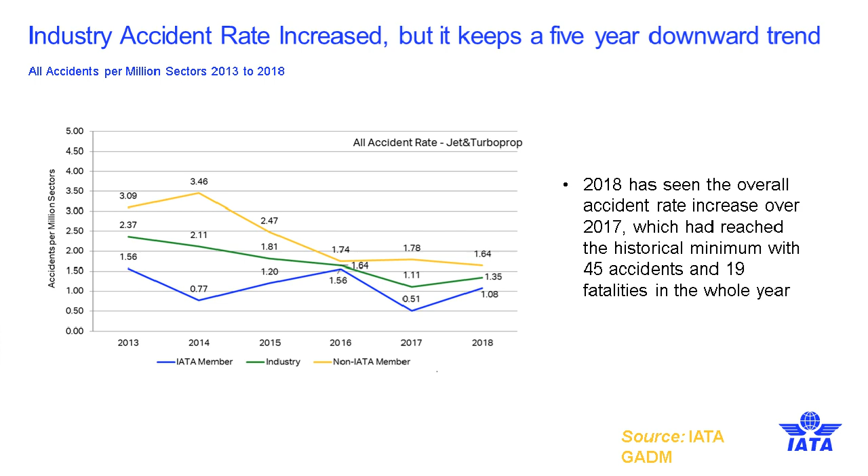We keep tabs on accident rates by region, and here we can see that in 7 out of our 8 regions, the accident rate has increased. The bottom number is a 5-year average between 2013 and 2017. The one in the middle is the rate for 2017, and the blue number on top is the accident rate for last year, 2018.

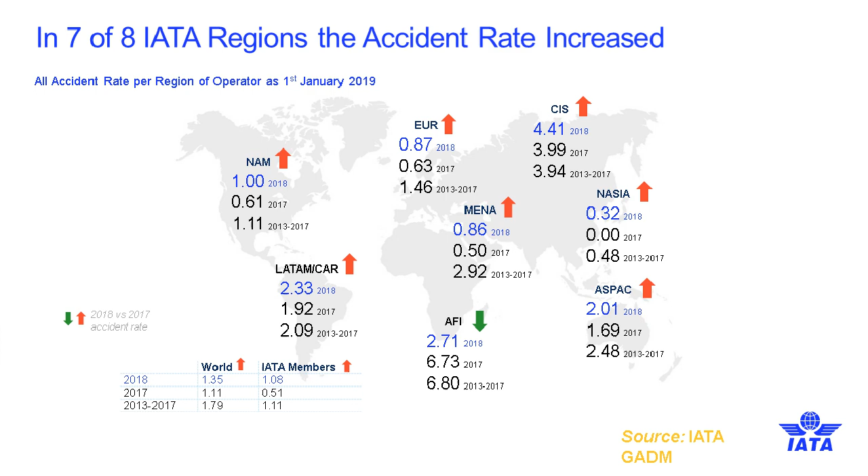As you see in the bottom left corner of the slide, the world accident rate increased from 2017. However, it's lower than the 5-year average. It increased both for IATA members and non-IATA member airlines.

Where we saw a sharp increase is in the number of fatalities, 523 last year. Still, IATA members have the lowest fatality risk, counting accidents per million sectors. However, this has been an increase, and it's the same rate basically we had in 2015.

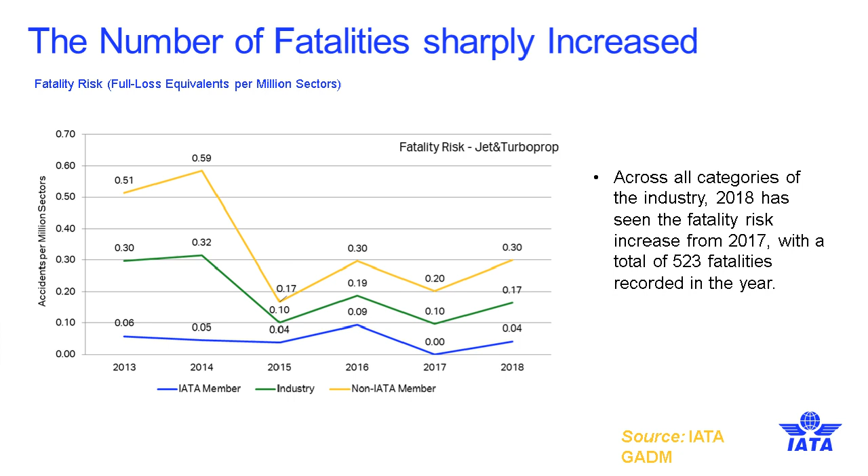When we look at this risk, it increased in 5 of 8 IATA regions: Asia Pacific, CIS, Africa, Latin America, and the Caribbean are the ones that saw the rate go up. IATA members had a slightly higher rate, but still lower than the average of the last 5 years, and the world also saw an increase from 2017.

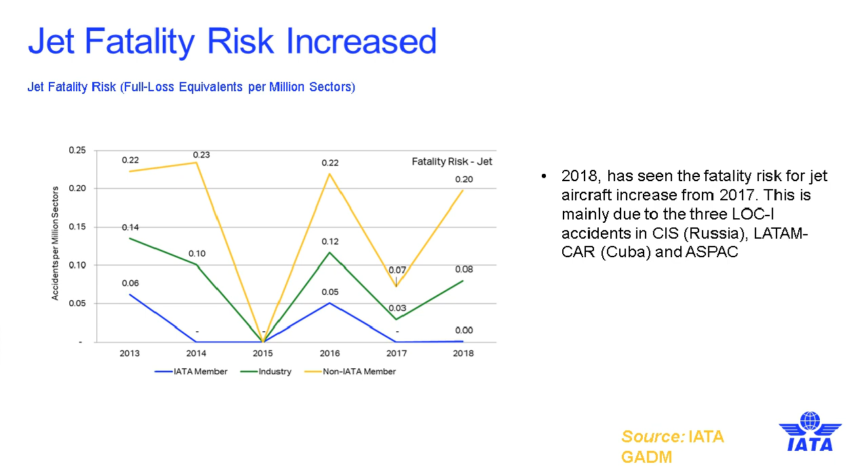Now we look at jets and turboprops because they seem to have generally different rates. What we saw last year for jets was a sharp increase in fatality risk. Again, the blue line is IATA member airlines, the green is all industry, and the yellow is non-IATA members. This sharp increase was mainly due to 3 accidents: one in the CIS, in Russia, one in Cuba, and one in the Asia Pacific region.

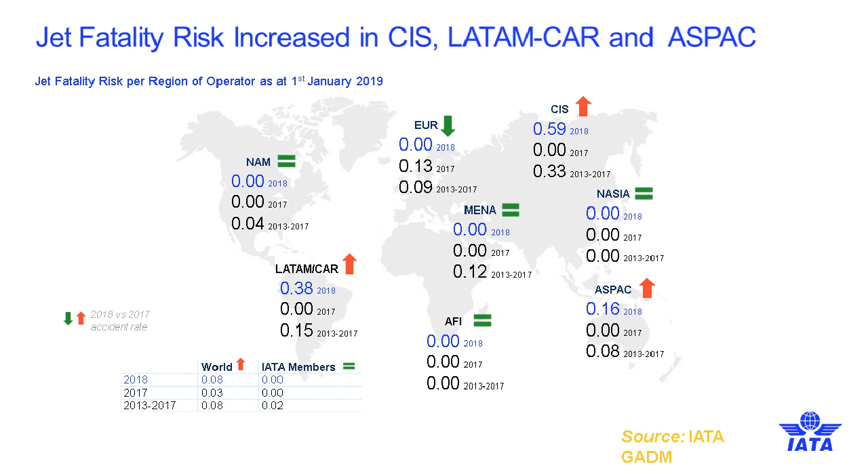By region of the world, this jet fatality risk stayed the same in 4 regions. It went down slightly in Europe and increased in Latin America and the Caribbean, and the CIS, the Commonwealth of Independent States. IATA members, however, had a 0 for 2018 and 2017, while the world went up.

As far as turboprops, there's another sharp increase, this time with IATA member airlines. This was due to an accident in Iran that had no survivors, and it was a controlled flight into terrain.

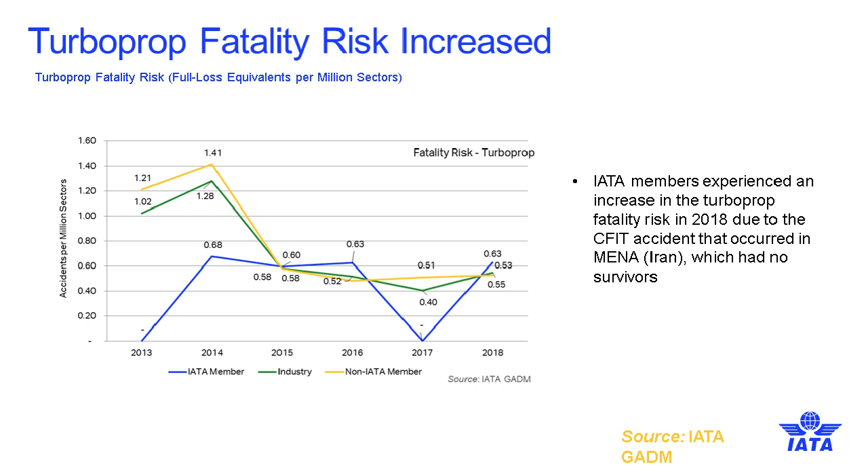And for turboprops, 2 regions of the world saw an increase in fatality risk, Africa and the Middle East and North Africa. Remained the same in 4 and decreased in the CIS and North America.

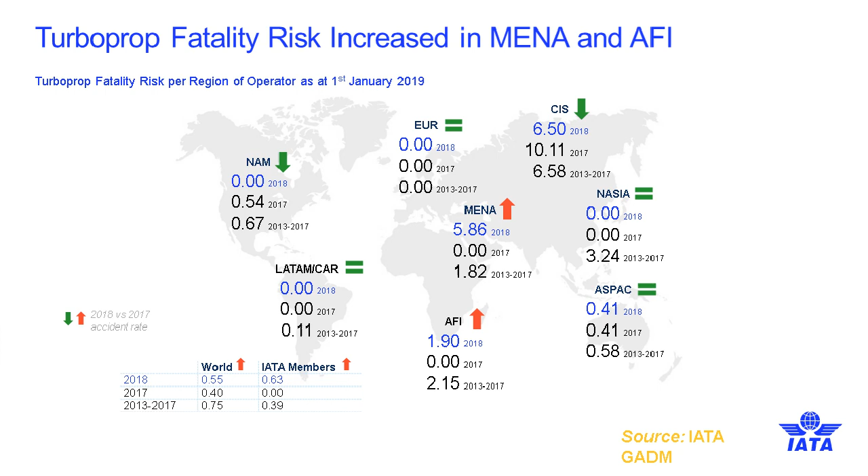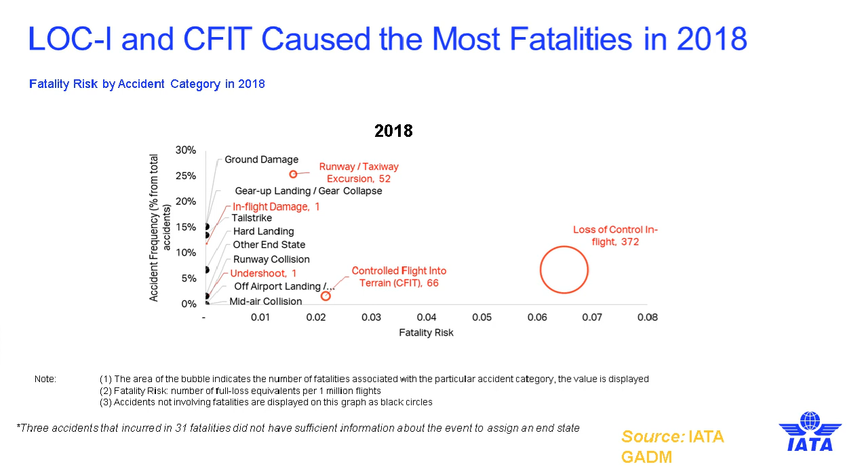Now let's look at the last 5 years for this chart, and it remains pretty much the same, with loss of control, CFIT, and runway excursions being the top 3. When we include 5 years, there's unclassified accident there, other end state with 314 fatalities. That is Malaysia Airlines 370. We hope one day we can properly classify that accident.

So if I were to go back another 5 years, the situation wouldn't change much. These 3 types of accidents have been occurring for a long, long time in the system, with runway and taxiway excursions not being the most fatal, but the most frequent accident for the last 10 years at least.

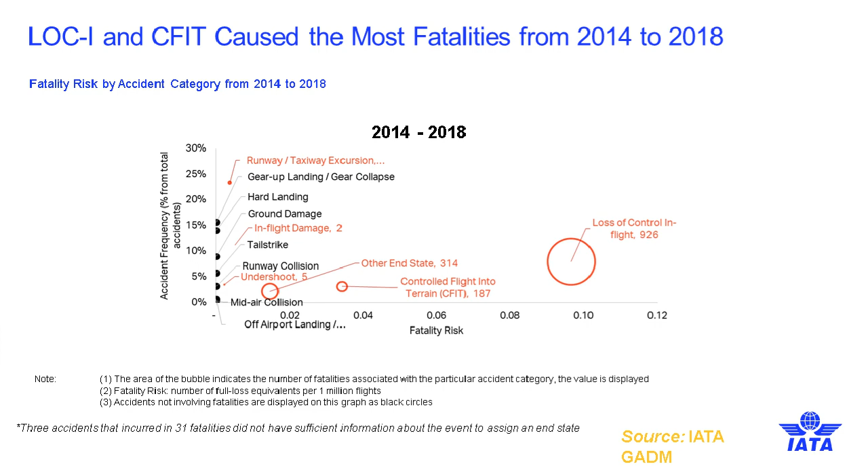When I say IATA member airlines, now I'm going to make a distinction between IATA member airlines and IOSA operators. It is a requirement for IATA membership to be registered in IOSA and pass the audit. However, there are many non-IATA member airlines that are in the IOSA registry. We have more than 430, when we have about 290 member airlines.

We do this chart by region of the world, and the yellow sector is non-IOSA airline accident rates, and the blue sector is IOSA registered airlines accident rates per million sectors. The situation varies by different region of the world. In the world at large, which is the bar at the extreme right, IOSA registered airlines have less than 1/2 the rate of the non-IOSA registered airlines. However, when you look at regions like Africa and the CIS, the difference is very significant. Same in Latin America and the Middle East.

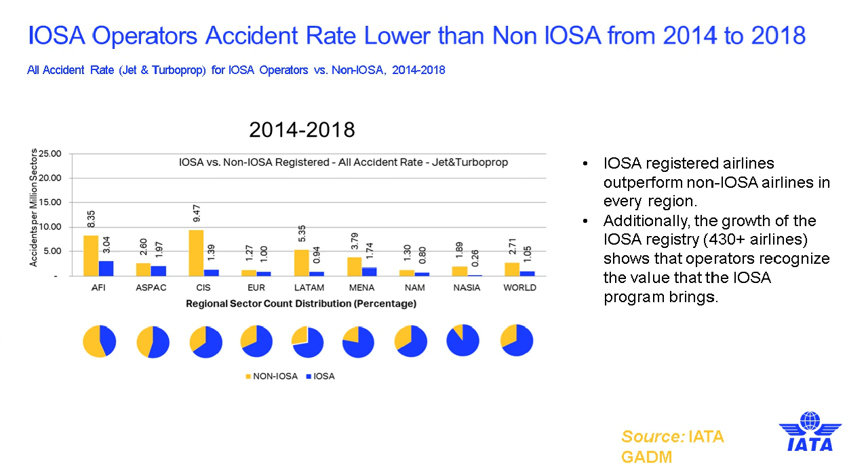Now, I'll briefly go over what we see as causal factors for these three types of accidents. And we have worked with many international organizations in the Americas, in Europe, here in Asia Pacific, with ICAO, to try to analyze some of the top contributing factors to these accidents.

So for loss of control in flight, and in this we have consensus with the Commercial Aviation Safety Team in the US and with EASA in Europe, we see lack of airplane energy state awareness or system state. And an emerging issue last year was an aeroplane system malfunction. By the way, the final report for that accident is not out yet, so it's been pre-classified as a loss of control, but we may have to review it or reclassify it once the final report is out.

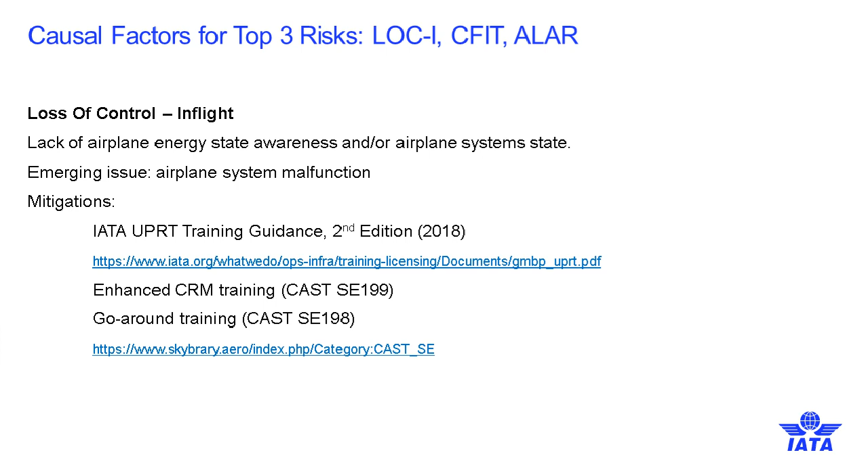Some of the mitigations available for this type of accident, we have a guide. It's free. You can find it at that link. We revised it last year. It's Upset Prevention and Recovery Training Guidance. The Commercial Aviation Safety Team, which we are part of, has produced a couple of safety enhancements that are available in SKYbrary, and there's a link for you if you want to find more information about those. Basically, enhance the CRM training and pay more attention to the training for go-arounds.

When it comes to controlled flight into terrain, this is an accident we thought that we were going to totally get out of the system with terrain awareness warning systems. And it was greatly reduced. However, not to the extent that we want to have it reduced. So the factors we see contributing to this are loss of situational awareness, lack of the equipment, lack of technology, or outdated software, or no GPS in the airplanes.

For this, around 2006, 2007, there was a safety enhancement published by CAST that has been widely adopted by airplane manufacturers. It's an update of the EGPWS software and connecting it to the GPS. I would say most airplanes delivered after probably 2008 or 9 already have the software version. However, for older airplanes, it's worth looking at that link and making sure, for most airplanes there should be a free software update. And it greatly reduces false warnings and increases the accuracy of the system.

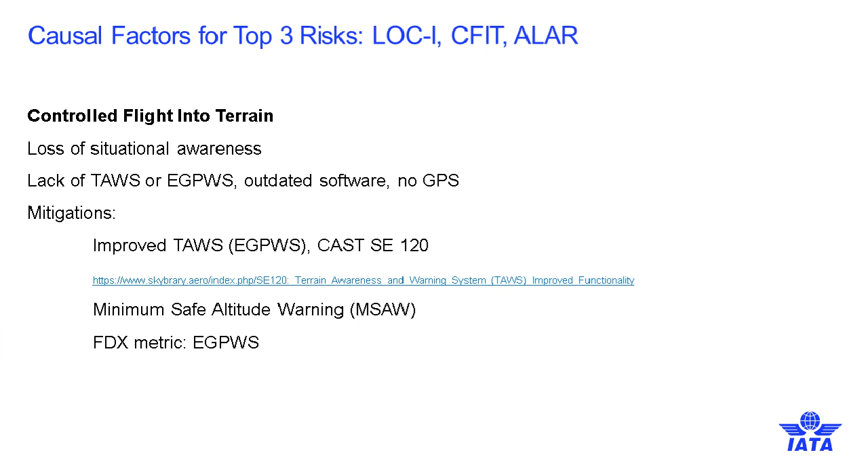For the third one, we really bundle and we call them approach and landing type of accidents. We include runway excursions, undershoots, overshoots, so landing before or after the runway, and abnormal runway contact, which is landing in a way that causes the aeroplane to break, like the recent Sukhoi Superjet in Russia.

The contributing factors we see, and these have been the same through the last few years, are unstable approaches, undesired states of the airplane, the failure to go around when the go-around maneuver needs to be executed, weather, of course, runway conditions, late runway changes.

We do have a new edition of our risk mitigation for unstable approaches guide. There's a link for you, and it's again free. And we work with the CAST on the development of those two safety enhancements. They're in the same Skybrary webpage where the ones in the previous slides were.

We also, with the Asia Pacific Regional Aviation Safety Team, have developed regional safety enhancements to prevent unstable approaches. The manufacturers, notably Airbus with the ROPS system, have also developed technology to prevent runway excursions.

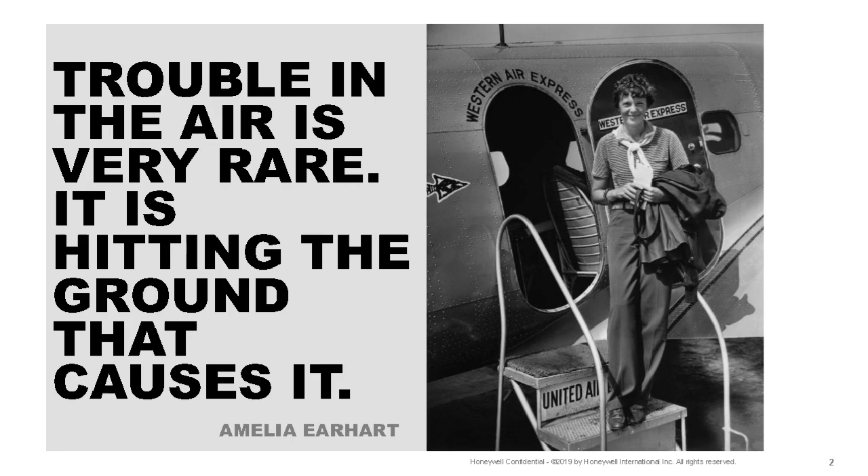So I think everybody is aware of the aviation pioneer Amelia Earhart, and if you look at one of her statements there: trouble in the air is very rare; it is hitting the ground that causes it. So that's a fascinating statement, definitely very true, and this statement was made before 1937. So it's very impressive because today I think this is still very valid.

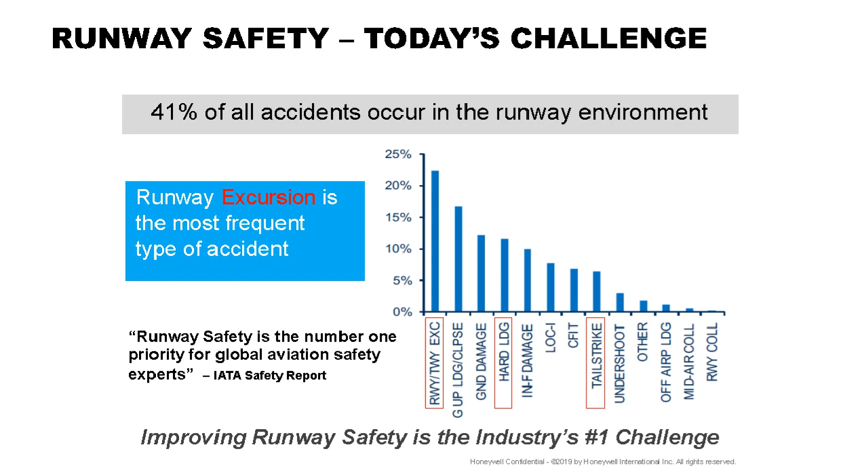And if you see here on the bar chart, on the bottom, you see three indications which are red. Those are number one, the runway taxiway excursions, then the hard landing and the tail strike. So if we look further into those safety reports, you see that during the landing, the approach and the go-around are the most contributing factors.

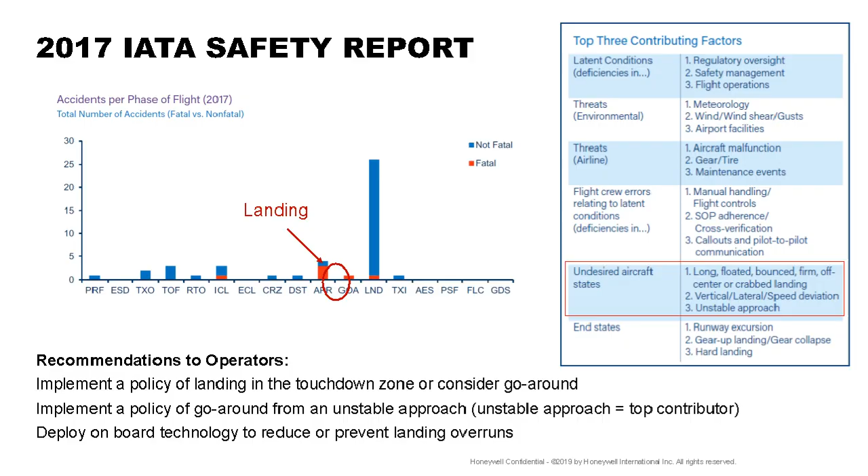So the recommendation to operators is to implement a policy of landing in the touchdown zone or consider a go-around, implement a policy of go-around from an unstable approach, and we just want to highlight again that unstable approach is a top contributor, and then deploy onboard technology to reduce or prevent landing overruns.

So if we look at this little chart here, if you follow this, what are the factors on an approach leading to runway excursion? So if we start on the top left side where you see the aircraft, this is where a pilot might have asked, is the landing configuration established, meaning are the flaps set? And then if you follow down the more thick

line at the very bottom in this little red stripe between 300 and 450 feet altitude, at that decision height, when you get closer to the touchdown zone, you might ask, am I actually aligned with the proper runway? This could be happening if you have an airport with parallel runways. So this is a very important information. Or am I unfortunately trying to target a taxiway, which is also happening pretty often

if you look at past history. If you follow the line from the top of the aircraft, where it goes a little bit forwards, where the aircraft is above the glide slope, for example, then typically the tendency is to do a nose down command to capture the glide slope again. But then this would mean you have a speed increase. And as you continue your descent and you try to capture the glide slope from above again, this is where you might go into this unstable approach condition.

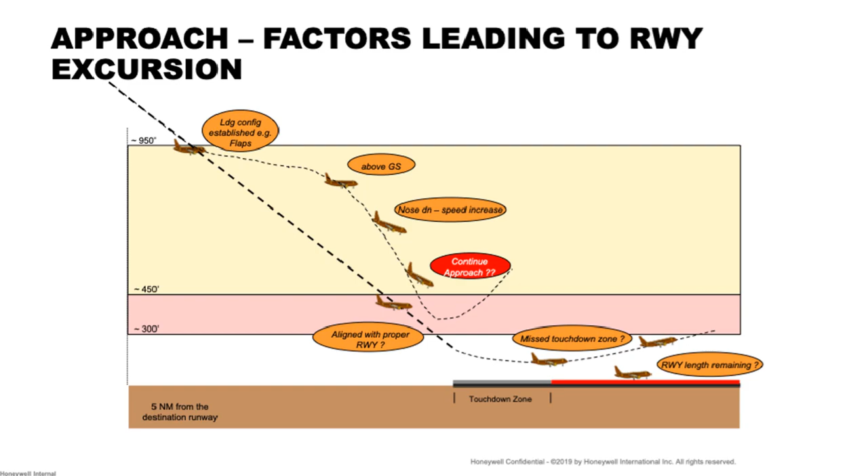So there is a critical decision factor, altitudes, to make a decision about am I still able to land the aircraft safely? Do I need to do a go-around? So this is where we will see a couple of statistics about the decision making here. And then certainly, as you try to really go to the touchdown zone, am I flaring too long? Do I miss the touchdown zone because I keep the aircraft in the air? Is the runway eventually getting too short to land safely? So those are all questions which are factors leading to runway excursions.

So this is a case study from Emirates Airlines, and this goes back almost 10 years now. So Emirates, they wanted a system which improves the taxiing and landing safety. It should complement existing pilot safety procedures, and it should be somehow configurable so they could use the standardized configuration amongst all their fleet with minimum training. So the solution provided was basically we looked together with Emirates on the data,

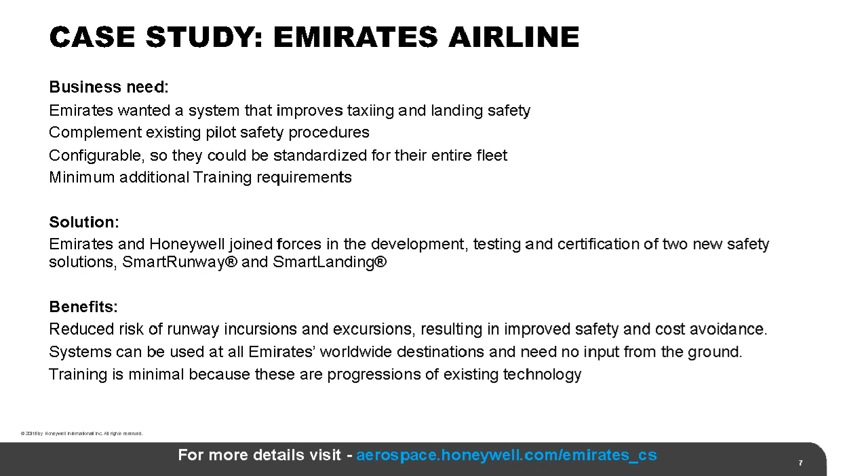and then we developed together and tested and certified the new safety solution, which we call Smart Runway and Smart Landing. And the benefit is definitely that there is a reduced risk of runway incursion, excursion, and it's resulting in improved safety and cost avoidance. And the system can be used at all Emirates airline platforms around the globe. And also there was a high emphasis on the training being minimal because it's an add-on to the existing technology.

So the technology breakthrough at that point was really going beyond the enhanced ground proximity warning system by adding additional software function which addresses almost all of those things we have seen in the chart where the landing, the glide slope was represented. So in the IATA safety report, the conclusion was that stable approaches are the first defense against runway excursions.

And if you sequence to the right, we made it possible by implementing a software feature alerting the crew to an unstable condition regardless of runway length, and it allows them to address instability before a go-around becomes necessary. So this also reinforces the proper pilot procedure. And the next IATA safety conclusion was that the final, more important defense is landing in the touchdown zone.

So if there is little or no visual reference to identify the end of the touchdown zone, the new software upgrade alerts the crew to landing beyond the touchdown zone regardless of the runway length. So there is a lot of data contained in the enhanced ground proximity warning system to support this. So Honeywell also did a study of 17 different runway excursions, and what we found is that 41% would have received an unstable approach warning.

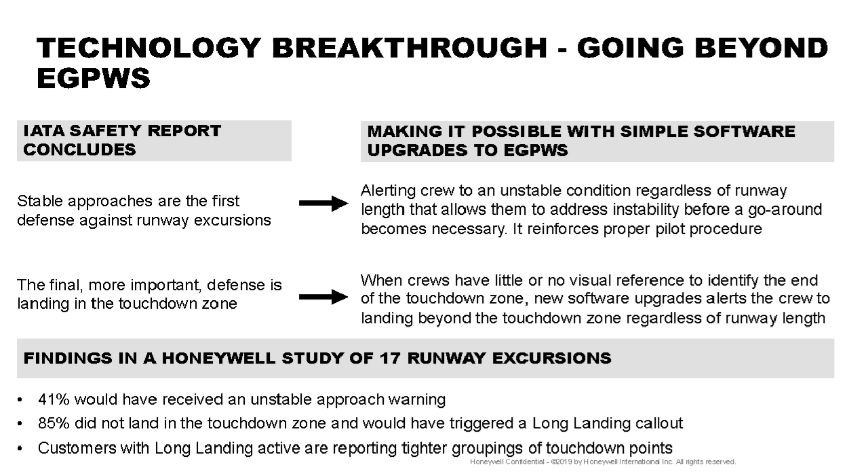85% did not land in the touchdown zone and would have triggered a long landing call-out. And the customers with a long landing call-out active are reporting tighter groupings of the touchdown points. So this is all basically positive feedback. There are certainly other systems from OEMs which also use the enhanced ground proximity warning system. For example, there is the so-called RAAS feature, which customers can order from Airbus or Boeing directly as a line fit, and it could also be retrofitted through an STC.

There's certainly the Honeywell Smart Runway Smart Landing feature, which includes this stabilized approach monitor. There is an energy-based system available from Airbus, which is called the ROPS system, Runway Overrun Prevention System. And the same system is available from Boeing. It has a different name. It's called RSAT, Runway Situational Awareness Tool.

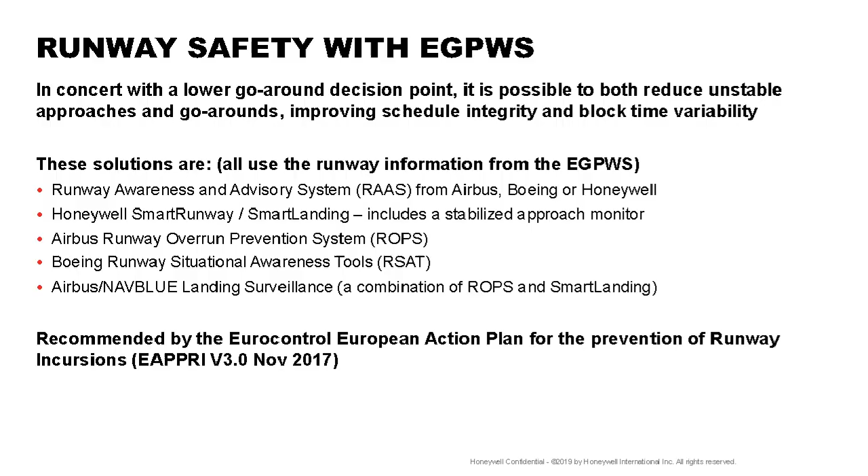And then recently, Airbus with NAVBLUE, they teamed together. We developed with an airline and Honeywell a landing surveillance, which is a combination of the ROPS and the smart landing system. And this all falls in line with the recommended Eurocontrol European Action Plan to prevent runway incursions. So if we talk about runway incursion surface collision prevention, there was also a European Action Plan published for this.

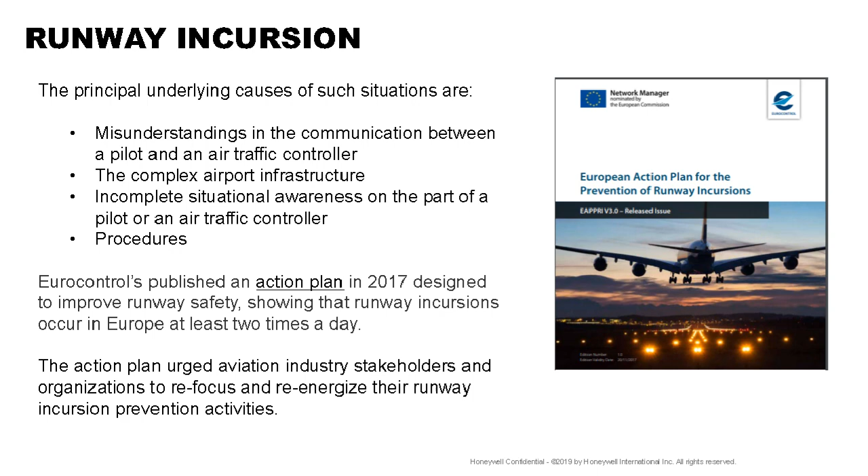So the root causes are typically a misunderstanding in the communication between the pilot and the air traffic controller, the complex airport infrastructure, the incomplete situational awareness on the part of a pilot or an air traffic controller, or some of the procedures. So this action plan was published in 2017 and definitely designed to improve the runway safety and the incursions.

So if you look at this case example, this was an accident which happened in 2016 in Shanghai, and you see an airport with two runways, 36 left and 36 right. And on the bottom of this little diagram, you see a blue aircraft, which is an Airbus 320 with 147 passengers. And this aircraft accelerated to take off from that 36 left runway. On the top right, you see an A330 aircraft, which came in with 266 passengers on runway 36 right, and it was taxiing, trying to cross runway 36 left.

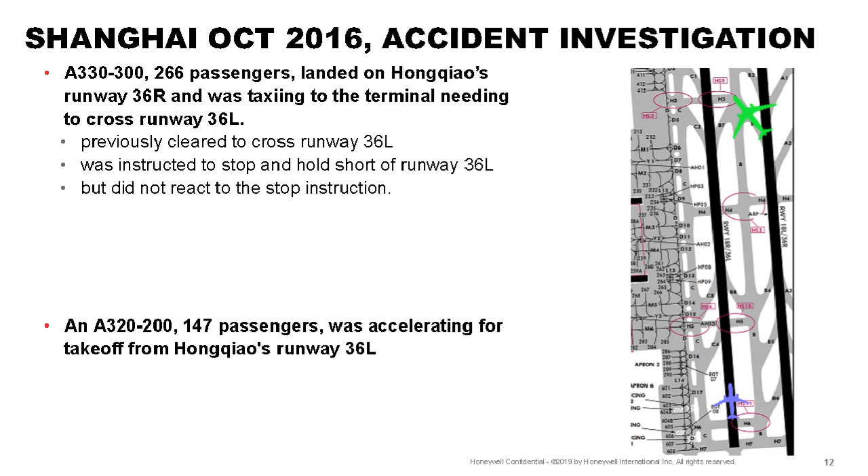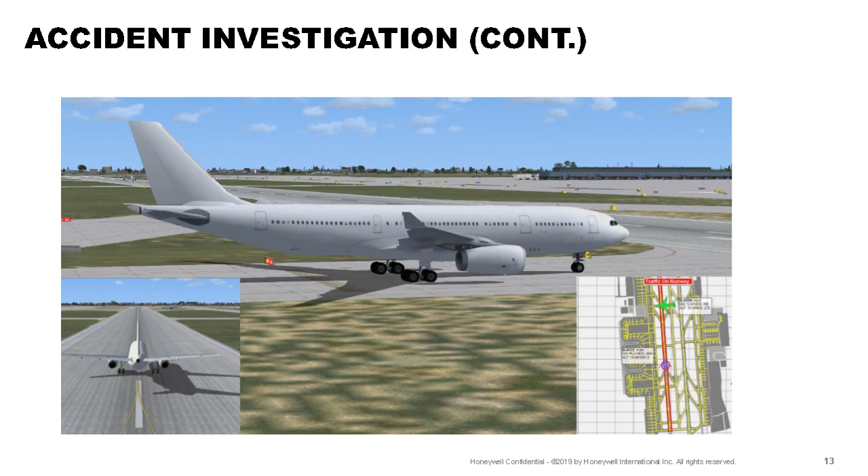So originally this aircraft was cleared to cross the runway, but then it was actually instructed to stop and hold short of runway 36 left. Unfortunately, the stop instruction was missed. So what's happening is, and you see a representation here, the A320 is going to accelerate, the A330 doesn't stop there, and because of a decision on the A320, they couldn't stop in time to avoid the collision, and then they decided to really climb up with an indicated airspeed of 130 knots, and they barely made it. So this would have been a very fatal accident with 413 passengers.

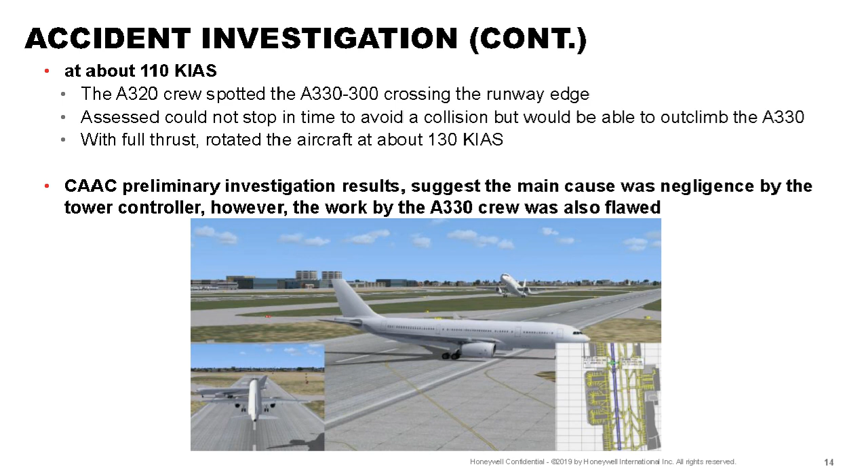So there is still some investigation ongoing, but anyhow, the preliminary investigation suggested the main cause was negligence by the tower controller and also by the A330 crew. Just this week, an Aero International magazine was released, and there is a similar accident which happened on June 15 in Tokyo under good weather conditions, where a 787 tried to cross the runway, and then an approaching 737 initiated a go-around. So there is not always a clear weather condition; certainly systems could alert pilots. It would have been great having a system on board alerting the pilots of traffic on the runway.

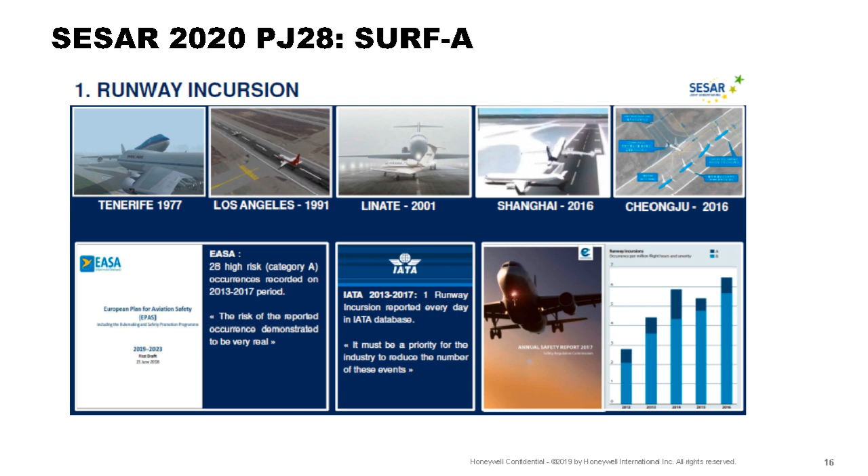So this is actually where another technology breakthrough was happening. It's called the SESAR SURF project, which aims to provide the pilots visual and audio warnings about approaching hazards on the runway. So basically, here you see on the top a couple of accidents which were significant, very severe, and then there is EASA, which basically said the risk of the reported occurrences is demonstrated to be very real, and it must be a priority for the industry to reduce the number of such events.

And if we look at some of the statistics again, there are runway incursion A and B occurrences. So basically it's two categories. Category A is a serious incident, collision narrowly avoided, and category B is where the separation decreases with significant potential for collision. So if you look at the statistics here, in the US region, it happens at 0.24 occurrences per million movements. And in the EU in 2016, there was a 12% increase over the previous year. This is due to the dense traffic, the situations, weather conditions, and so on.

And the projection is for a major carrier, 700,000 movements per year, that a category A event would occur 0.56 times per year, and a category B event would occur almost 4 times per year. So those are pretty alarming figures. And just to bring this in a little bit better perspective, currently there are around 202,000 flights globally per day. So we're talking about movements here. So think about if an airline operates an aircraft 2-3 times, those are like 4 to 6 movements already. So pretty significant numbers here. So on the SURF project itself, the objective is very clear.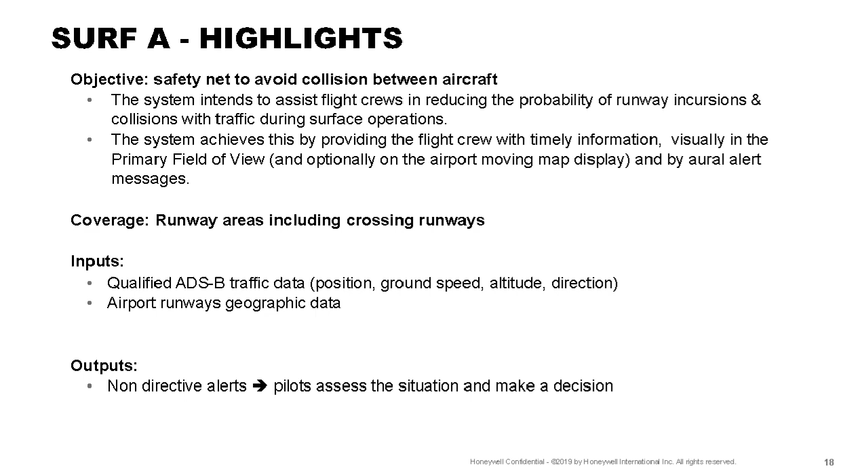So a little bit of the concept here: when an aircraft comes in and aligns, if the aircraft would not stop, there would be an alert. This would have been the Shanghai case example we presented, where the A330 would have received a proper alert to be able to stop and avoid any of those category A cases.

There is also a second example, when an aircraft comes in and another one is still aligned and hasn't proceeded to take off — the approaching aircraft would receive an alert. Example number 3 is where the aircraft has not exited yet from the runway and another aircraft is aligned to take off, so there would also be an alert.

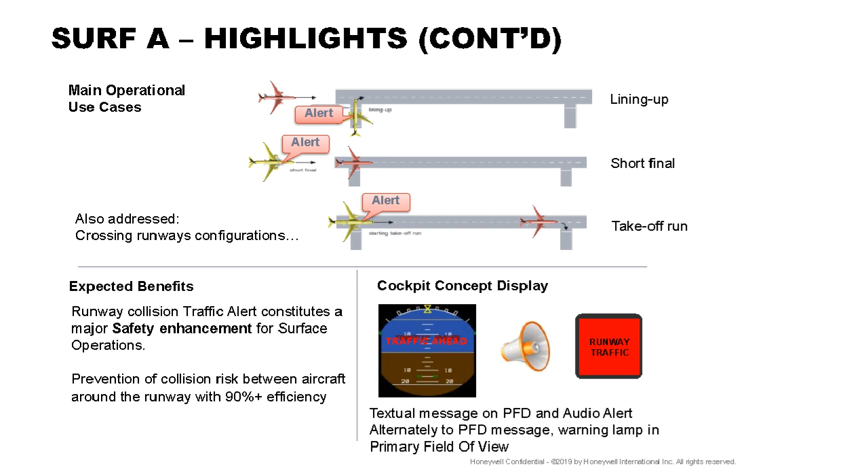The concept would be an audio alert and, if possible, also a visual alert brought into the cockpit.

In terms of a roadmap, you see who is involved: Airbus, Honeywell, Eurocontrol, Dassault, IATA, and certainly all the regulatory agencies. Honeywell did a lot of VOCs with operators, and we did a lot of data collection. We used real ADS-B data and replayed it, and it really demonstrates that this is the way to go forward.

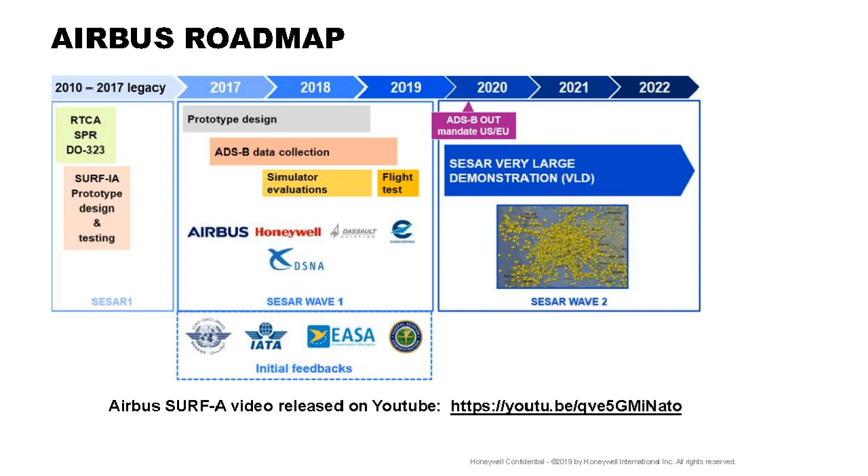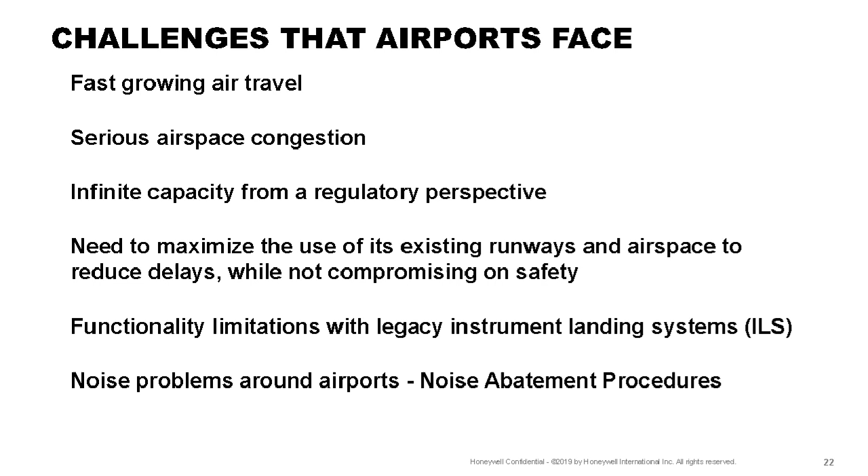In terms of airport operations, runway safety and efficiency, the challenges are fast-growing air travel, serious airspace congestion, and finite capacity from a regulatory perspective. There's definitely a need to maximize the use of existing runways and airspace to reduce delays without compromising safety. There are functionality limitations with legacy instrument landing systems, the ILS, and there are noise problems around the airport where certain noise abatement procedures have to be met.

GBAS also enhances category 1 and 2 approach capability and is less disturbed by weather conditions. For example, in New York in 2016 there was a winter storm and all the ILS systems at the airport were basically non-functional, but luckily GBAS continued to work.

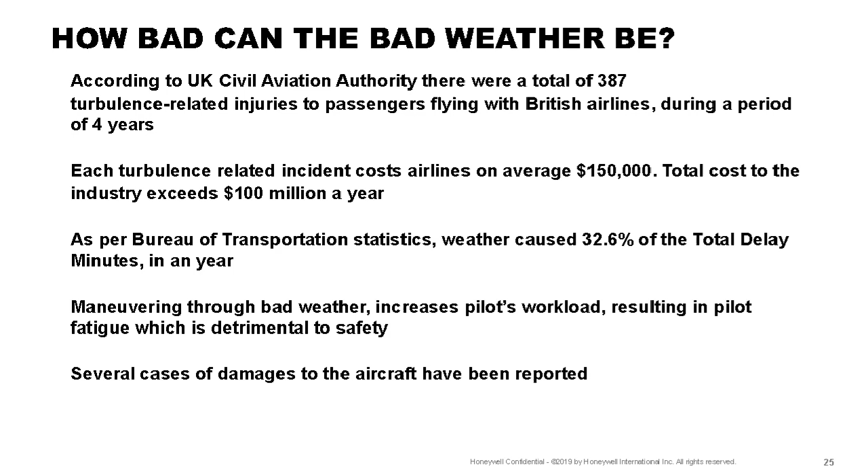According to the Bureau of Transportation Statistics, weather causes 32.6% of total delay minutes in a year. Maneuvering through bad weather increases pilot workload, resulting in pilot fatigue, which is detrimental to safety. Several cases of damage to aircraft have also been reported.

Looking at traditional weather radar systems, the tilt-based manual mode requires pilot calculation to determine the cell tops. So tilt management is key to improving the safety of an aircraft during flight. Proper tilt management is really a requirement.

Traditional radar systems also only scan a portion of the airspace in front of the aircraft, because typically you're using only 1 or 2 tilt angles to look at the weather, and you don't change it throughout the flight. But proper tilt management would require you to change it if you want to analyze weather differently, change your range, or change your altitude. The radar operation is typically restricted to only one view at a time.

In a lot of cases, there isn't something like dual operation possible. There's also no vertical awareness of the weather. You only look at a certain altitude with a certain slice of the radar beam, and you don't get the complete vertical picture of the cell growth.

Typical radar systems also cannot remove ground clutter from the weather, which can be confusing. So a lot of experience and tilt management has to be used in order to find out if it's really a weather cell or a ground return, which adds to the pilot workload.

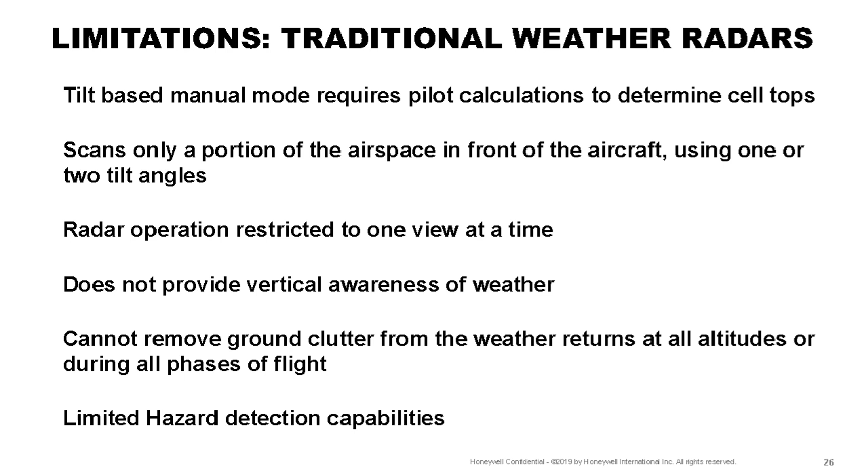And then there's certainly limited hazard detection capability. Very experienced pilots understand atmospheric conditions well. They know how to interpret the radar image, how to interpret scalloped edges, fingers, hooks, U-shapes - those are the typical things you would use on a typical radar system.

The technology breakthrough is the 3D weather radar system. If you look at the top left side, the Honeywell RDR 4000 3D IntuVue system scans constantly from 0 to 60,000 feet, 320 nautical miles out, which means you capture all weather at one time.

It's regional independent. Following the arrow to the top right scheme here, we put all this data into a 3D buffer where it's stored, and then we can do good things - like on the bottom left, you'll see we have a database in the radar system where we can actually filter out the terrain.

So we really only represent the weather cell itself, so you don't need to care about ground returns anymore, you don't need to think about it. We really display what's important to you. The database is basically a version we derived from the enhanced ground proximity warning system, because we have a very sophisticated database there - we invested a lot of money.

On the bottom center picture, you see we do a flight path scheme. We try to show you only the weather you should be concerned about and which is ahead of you, but we're not hiding any weather. We're using a full color picture versus a cross-hatched pattern. On the right screen, you might see this a little.

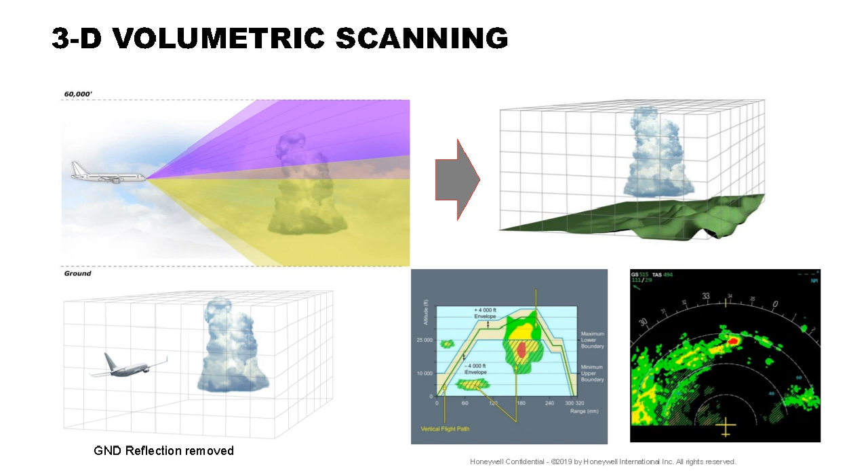I hope you have a better image than I have here on my screen, but the solid ones are basically everything which is in your flight path, really at your altitude, a little bit above and below, and which is of concern for you.

So that's the Honeywell radar. If you go on the right side, the right screen here, you see a couple of symbols. This is the hail and lightning feature.

So the radar with its capabilities and the 3D buffer, we can look very thoroughly on the cell content. We can see how the cells are developing, and then we can put up hail and lightning icons, which are very easily detected by the pilot.

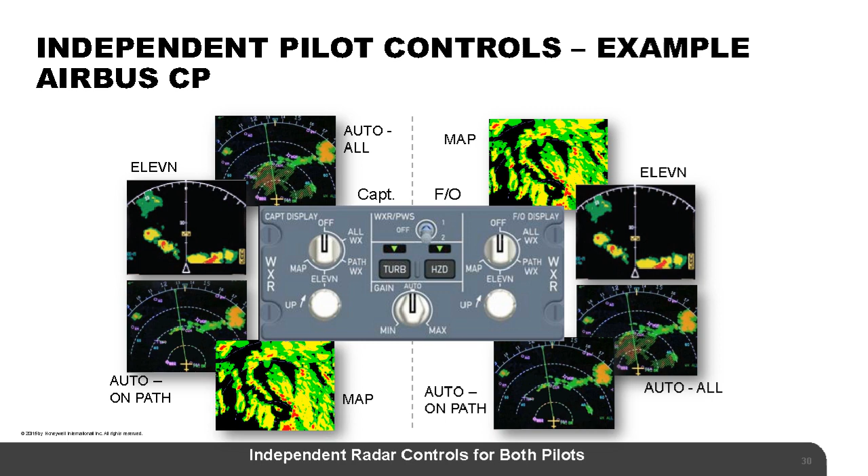What we currently have in the pipe is also a 2-level turbulence going out to 120 nautical miles. This is coming also from a lot of pilot VOCs we did. So we're really active in trying to see what is the industry interest in improving, enhancing, and providing more safety to the community.

So this was one of those things. And as you can see, there is a 2-level. So we're trying to use the solid versus the crosshatch pattern. And on the right side, you see that we will put in a cell tracking for diversion planning.

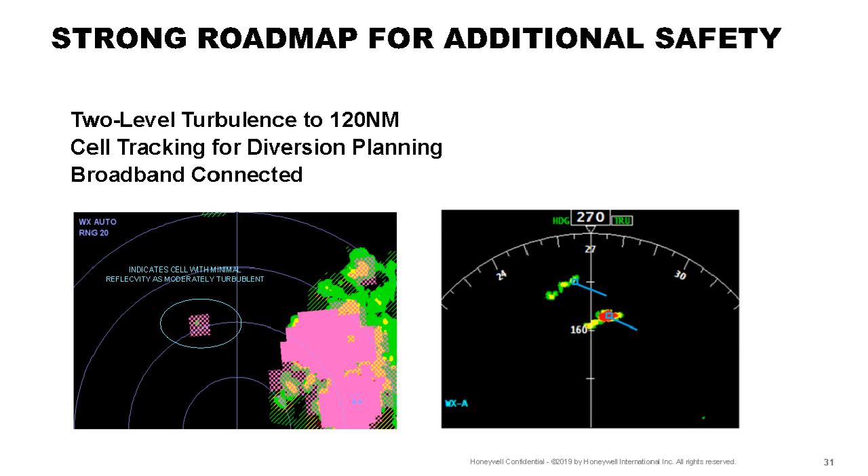So we had a case study with Air India, and the business issue was basically bad weather with bad weather warnings by existing systems. The solution was basically using the 3D radar system, which looks at 0 to 60,000 feet, 320 miles out. After the radar was implemented into the system, Air India reported substantial improvement in the ability to see upcoming weather systems and turbulence, and to make the necessary steps for earlier weather avoidance.

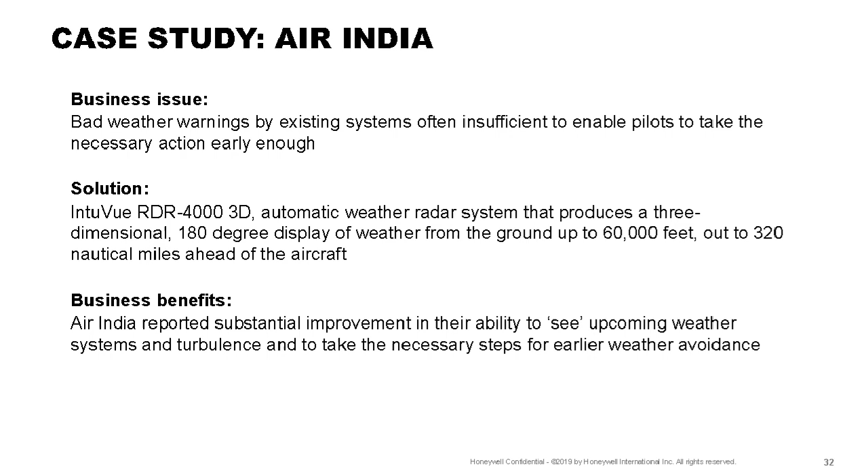On customers which are using the hazard functions, this is where you get the hail and lightning icons. And they typically report 50 to 70% reduction of this. And this is also proven by some of the drone inspections they do with the aircraft.

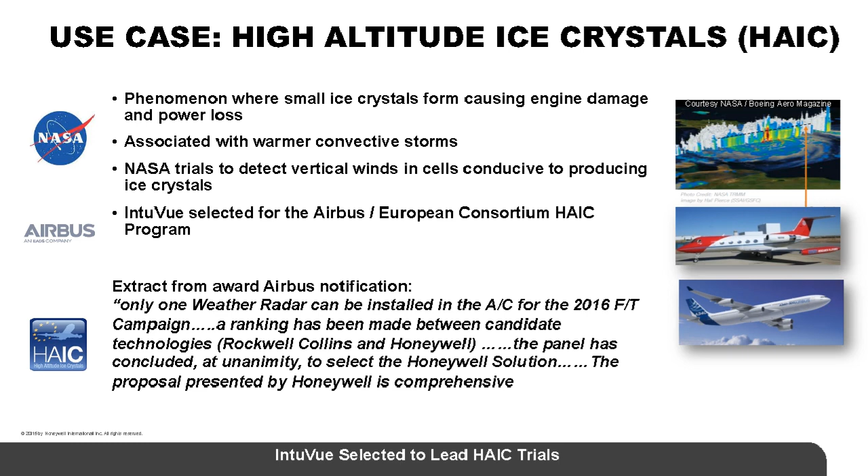Another project we're working on is the high altitude ice crystals. So there's NASA involved, Airbus involved, and Honeywell is involved. And on the bottom, you see that there was a campaign out there where the consortium was looking for a radar system, and Honeywell was clearly chosen here for that kind of high altitude ice crystal project.

Just doing a quick reminder on safety mandates, because it's like 5 to 12 already. There is the DO-260B compliance for the ADS-B. This is the 7th of June 2020. So I urge all operators who have not yet done anything in that regard and need to comply, you really need to hurry up. You need to get your orders in. You need to think about how you upgrade your aircraft, consider aircraft downtime, because time is really running out very, very quickly.

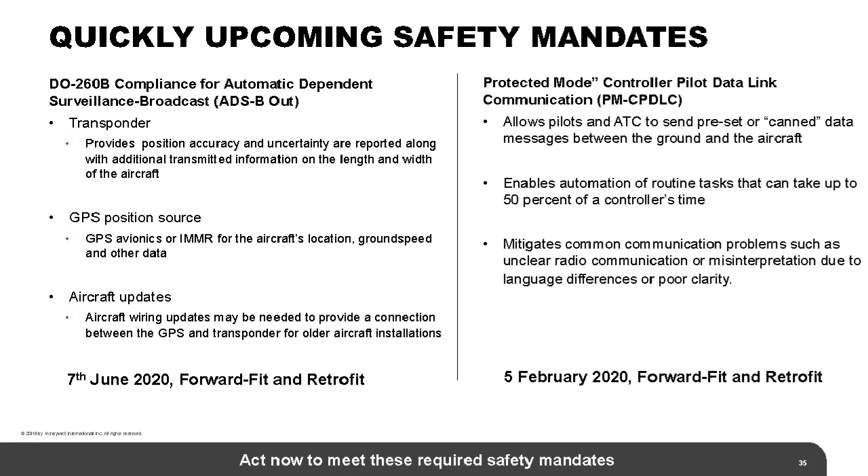And on the same line, there is the PM CPDLC requirement. So a lot of airlines have already a system installed, but it might not meet the current requirements, which were also a little bit changed. We talk about a white paper. So this is actually going to have to be compliant 5th of February 2020 with the forward fit and retrofit.

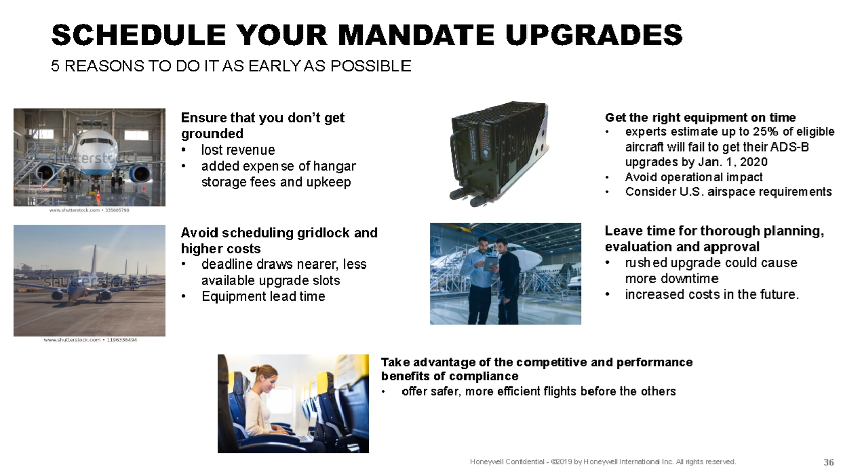Today is a very historic date. 50 years ago, the Apollo 11 Saturn V rocket went into the sky to put the first man on the moon. When coming back, Neil Armstrong was asked about when he took over manually the lunar landing, which was not as per mission description. The mission rule was to have an automatic landing on the moon, per system design. Neil Armstrong, as you all know, chose to switch off the automatic landing system and had basically what we call a semi-manual or semi-automatic landing.

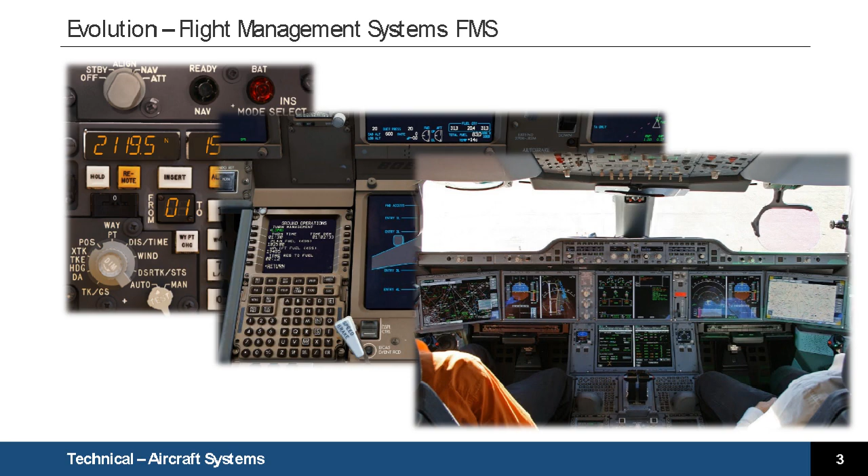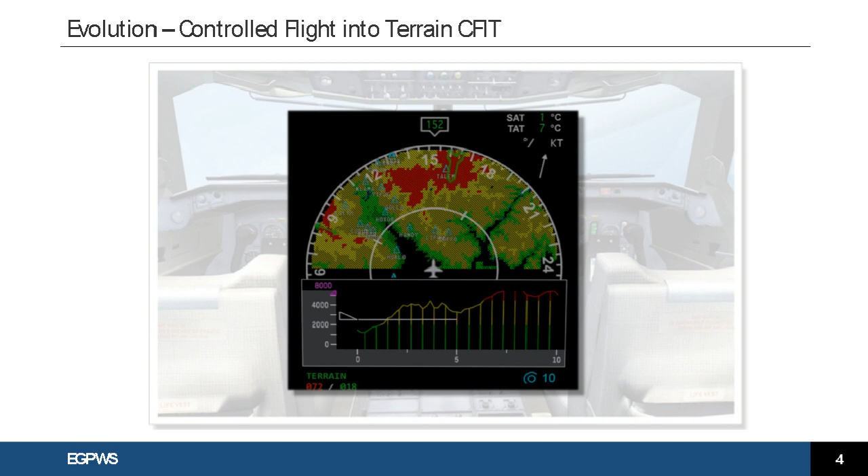Controlled flight into terrain, a lot has been said about this. Yes, all our systems, especially the EGPWS system, has helped us greatly to eliminate that as the largest safety risk in aviation. So that system actually helped us do a great job, and this was one of the systems which could actually be used in a full flight sim in a highly sophisticated way to do the training properly.

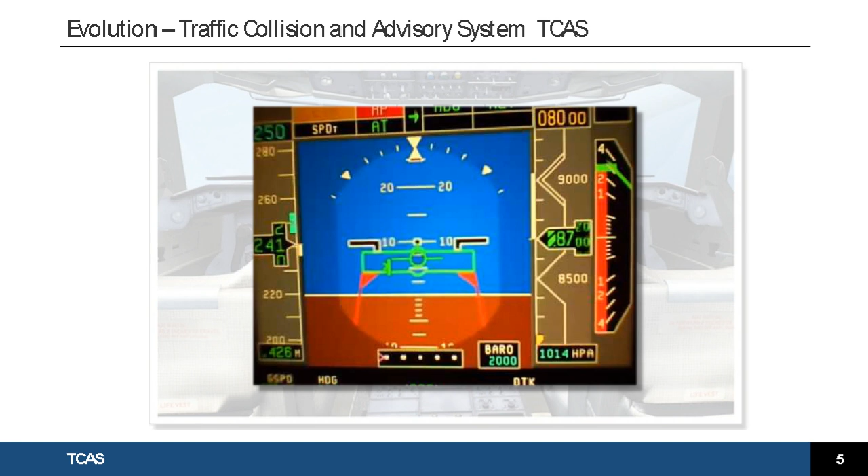Weather radar system is an increasingly important system, as Alois has told us. However, from a pilot's perspective, what I know from the industry - and I think I have a pretty good network - weather radar is the system with the poorest training and with the least understanding by pilots. Why is that? Because the simulator cannot do the proper training a weather radar system would require. The full flight sim is probably not the best location to really learn and understand a weather radar system. Alois has told us a lot about those great functions and features today's weather radar system can provide.

Here is something you have probably noticed: training is one of my top priorities to increase safety performance indicators.

We need something else besides simulator training to really make full use of those safety features, and that is, I would call it, a weather radar app, an interactive weather radar app or something like that, for a mobile device or for a computer, where pilots can really play and fully understand the capabilities and the controls of radar weather systems. We just don't have the time in the sim to go through all those great features.

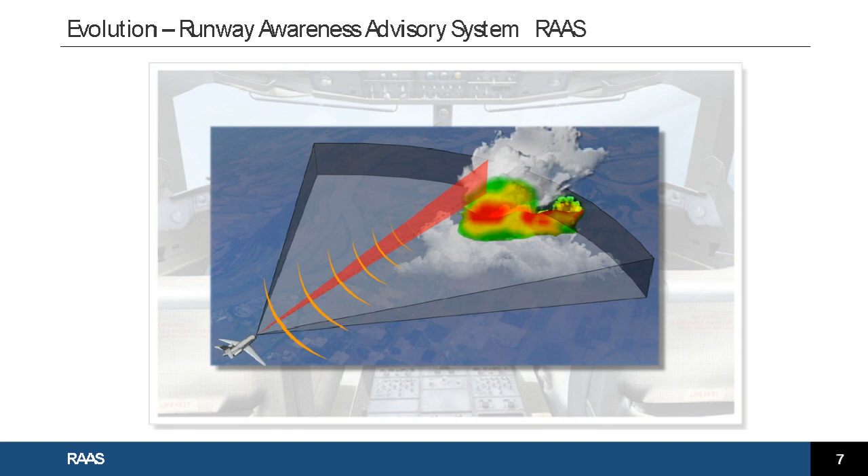So it's on top of my wish list to increase training capabilities and look for new training apps or new training options for the pilots. I'm awfully sorry, I should have a different picture here for RAAS. RAS, we have them on our aircraft, like the Embraer or the CRJs or the Airbus. RAS is a great display, and it really increases situational awareness, and that's what we need. Yes, I agree, RAS does not require a lot of training. We can easily put that in a sim, and that works well.

What has industry done? Industry is looking from a different perspective, not only technology, but also what pilots can do. So how can we improve flight path management? How can we increase the monitoring, go-around decision making and all those features? So there are really good publications out there on what we can do. However, I would caution everyone, training is not everything if it is not done properly, but if we can have the time, and that is the problem in the industry, we need more time to train those things, and the pressure to reduce the training time is getting more and more.

Flight mode annunciator awareness is one of those key elements from those publications where we actually do have a lot of attention from the very beginning in the training to increase flight mode annunciator awareness. So any engineering effort should also address the optimization and the evolution of flight mode annunciation awareness so that the pilots will be presented the actual state of the aircraft in a proper way.

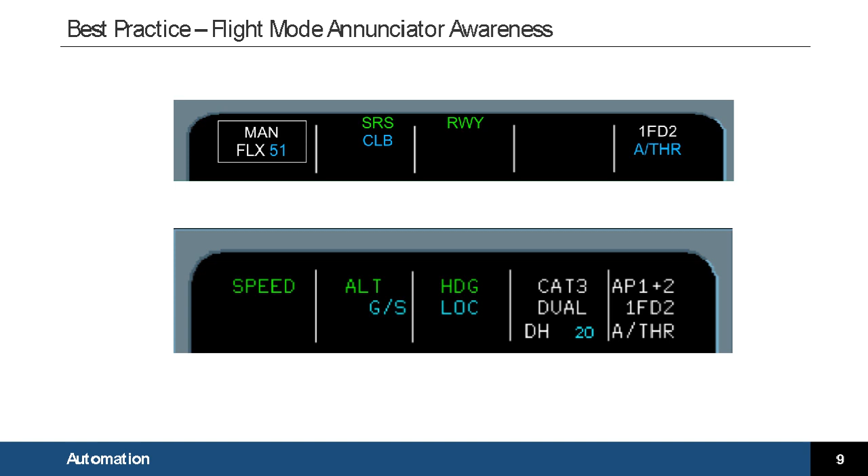Okay, yeah. So automation in aviation, we're using a lot more automation features than the guys a lot of years ago. So we have to face that, and this is in everybody's mind, how to use the automation in an appropriate way. This is a training effort. This is procedures. So we took that from those publications. We took a lot of that intelligence out and put it directly into training, how to use the automation in a proper way.

So automation must be effective. It's not only to put any system on the aircraft, it has to be well thought out. Interaction of those systems and the man-machine interface is a highly important part of that development, as you know. So I will skip that a little bit, as we have our Alois, and we have seen that before.

Vertical displays on our latest aircraft designs are, for me and for a lot of other pilots, a highly critical and important part, to have more and more information displayed on the vertical path as well as on the lateral path, as this will increase situation awareness. Increasing situation awareness is part of increasing our safety performance indicators. So anything that we can put in there is highly recommended.

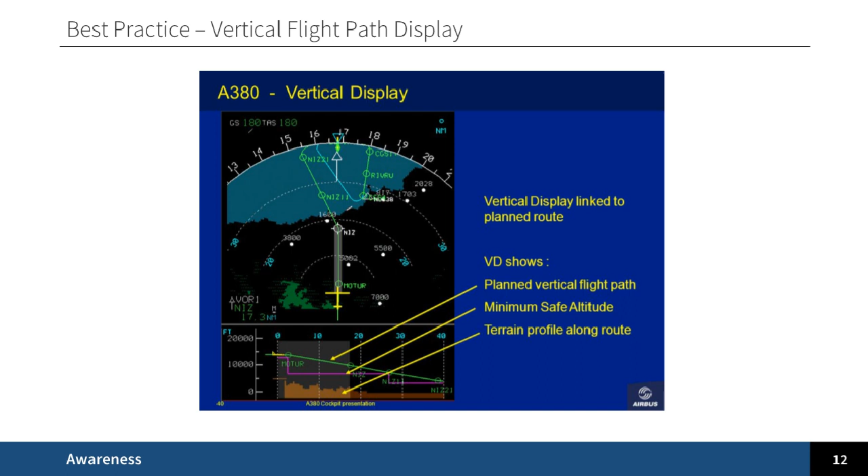And now here I come to one of my favorite subjects. It is the head-up display system. Head-up display systems will give you a conformal display of the flight path trajectory. It's the flight path and energy state awareness with the acceleration caret and the flight path indicator. We have heard a lot during the last two presentations on risk analysis. I would even recommend in the future to have risk analysis like what we saw from IATA distinguish between non-head-up display aircraft and head-up display aircraft to see where the differences are.

From the industry data we have, head-up display significantly increases the safety of our aircraft. When we look at hard landing, tail strike, runway excursion, undesired aircraft state, unstable approach, go-around, approach stability, we see that aircraft actively flown with a head-up display system during every approach give much better numbers than non-head-up display equipped aircraft.

When we go to UPRT training, and this is one topic I would like to raise for your thought. Yes, we have implemented UPRT training. However, when we look at ILS training or go-around stability, we do have data from IOSA or LOSA or whatever, or from FOQA or flight data monitoring; we can actually draw the data and see how much better we are.

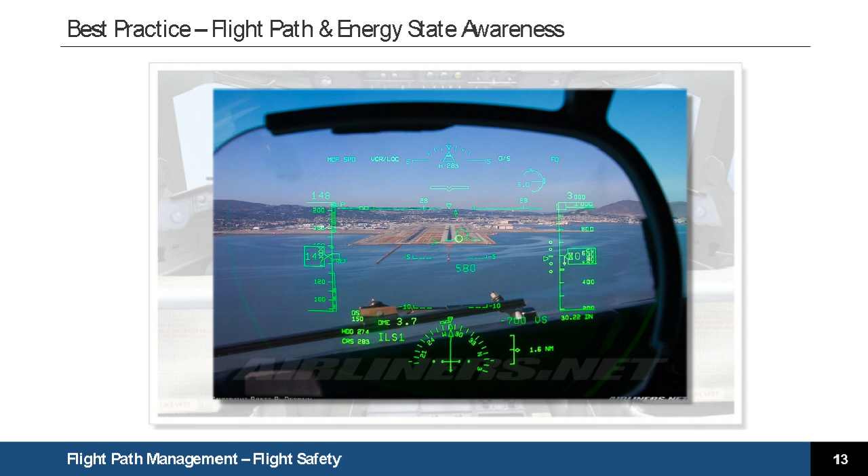What we know is from companies using head-up display systems and actively displaying G-load in the pilot's field of view during any recovery, that those pilots are doing much better in recovery than pilots just doing something. So head-up display can significantly increase the overall safety of an airline operation.

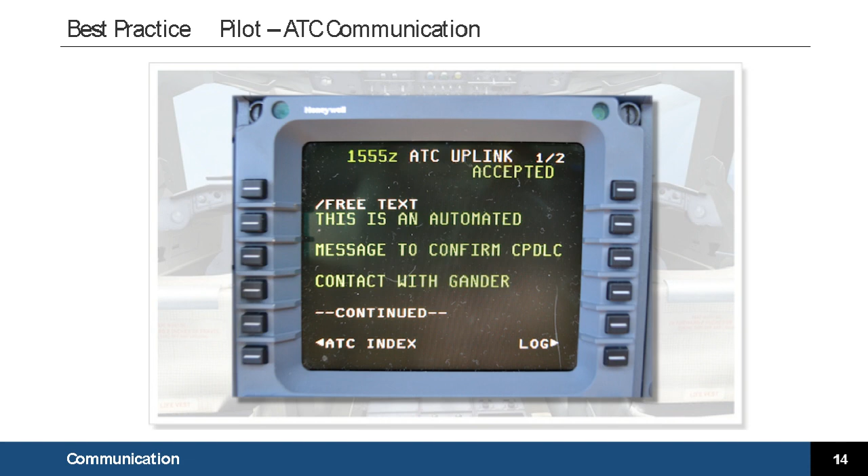CPDLC, yeah, I like that very much as I'm flying the A340 now. So CPDLC in any part of the world where we can use it is workload reducing and thus increasing safety. This is all done, and all those factors, so that we have an effective team in the cockpit.

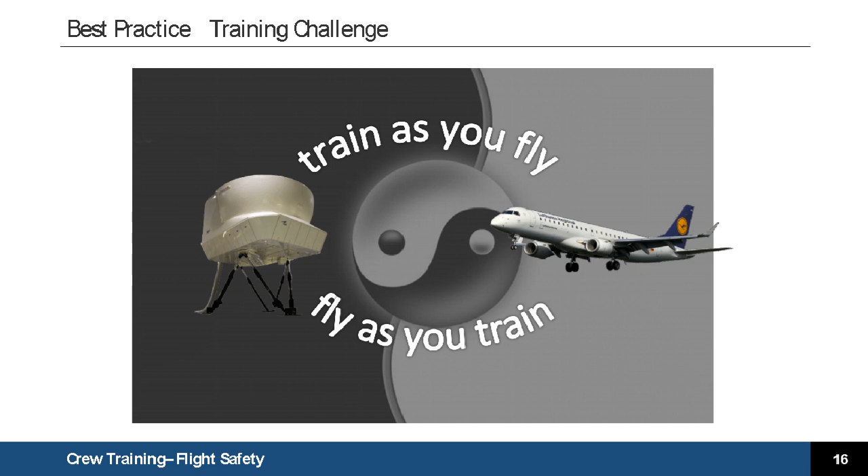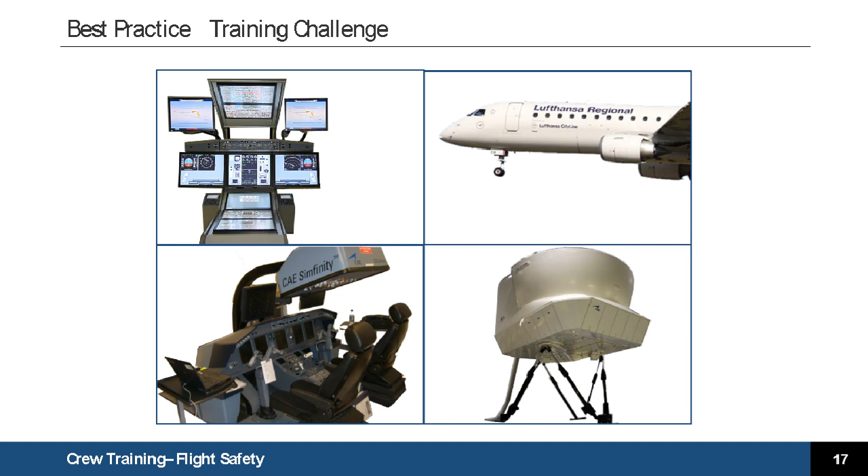Everything we do in adding new systems on the aircraft to increase safety, my recommendation would be to look at how it can be trained, as we should train as we fly, fly as we train. And so thinking of training from the first day is one of my top priorities. So having specific systems in a lower level device might be much more efficient in training than putting it all in the full flight sim, or even leaving it alone with less training and just putting it on the aircraft and having pilots not trained.

The go-around decision-making project, we have worked on this so far. As you may know, Air Canada and Porter Airlines have now reworked their policies on decision-making to take the stable approach criteria away from the go-around decision-making point. Air Canada is now having that 1,000 feet stable approach gate, and the go-around decision gate will be at 200 feet. Porter Airlines has that at 100 feet. So we see that there is an evolutionary process going on in making go-arounds more efficient.

I would just like to draw your attention to the fact that getting to 100% go-around execution is not in the interest of any airline, as this would be highly costly, and we would not have looked into additional risks when every unstable approach leads to a go-around. As well, not every unstable approach is a risky approach. So this paper has done a great thing. We are continuing to work with it, and there is work in progress.

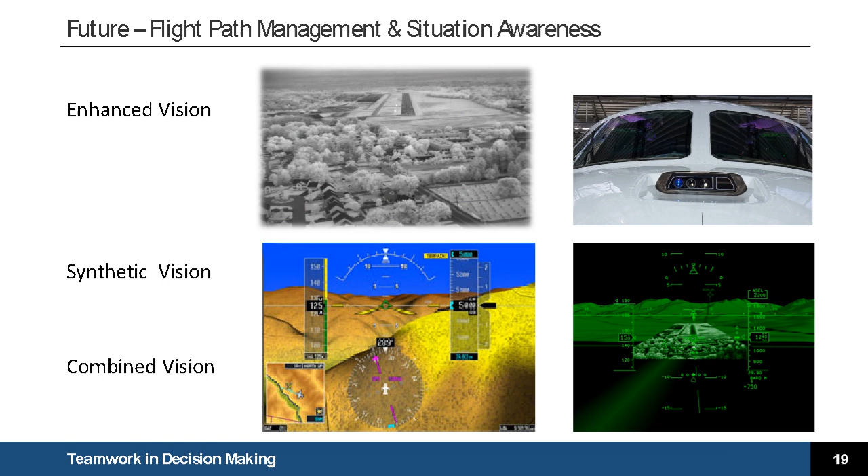What else can we do to increase safety? Enhanced vision is something that business aviation has completely encompassed and is using. This would be in the future, from my point of view, highly desirable. And Airbus is now also going to invest in enhanced vision for the Airbus A320 family. Synthetic vision, that's what we see on the Honeywell system as well. Great system. This is all adding to situational awareness, and this will be able to increase situational awareness if done properly and if all the limitations of such systems are well understood by the pilot.

Alois has talked about those things. They will increase safety: flight deck technology, procedures, what I have talked about so far, what we can take from industry intelligence, training aids, and this is something I would like to draw your attention to again. Anything that comes from a system point of view, technology has to have training from the first day. It will increase safety. We're looking at man-machine integration. And if all comes together, I would call upon you not to look at what can increase safety from an either-or point of view, but more from a both-and point of view. Enhanced flight safety, that was it from my point of view, and thank you very much for listening.